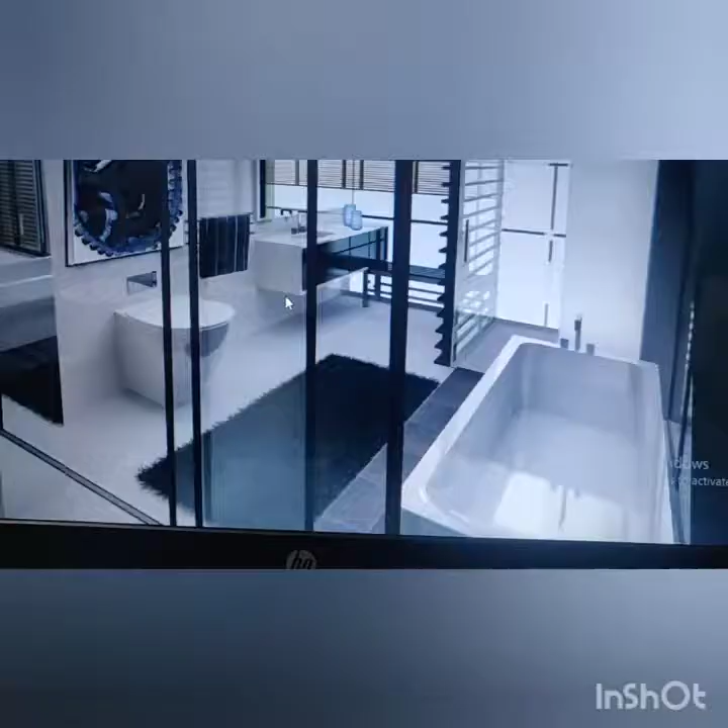This is the bathroom of contemporary design, with total modern furniture and interior. Hindware and Jaguar fittings are used throughout this contemporary design.

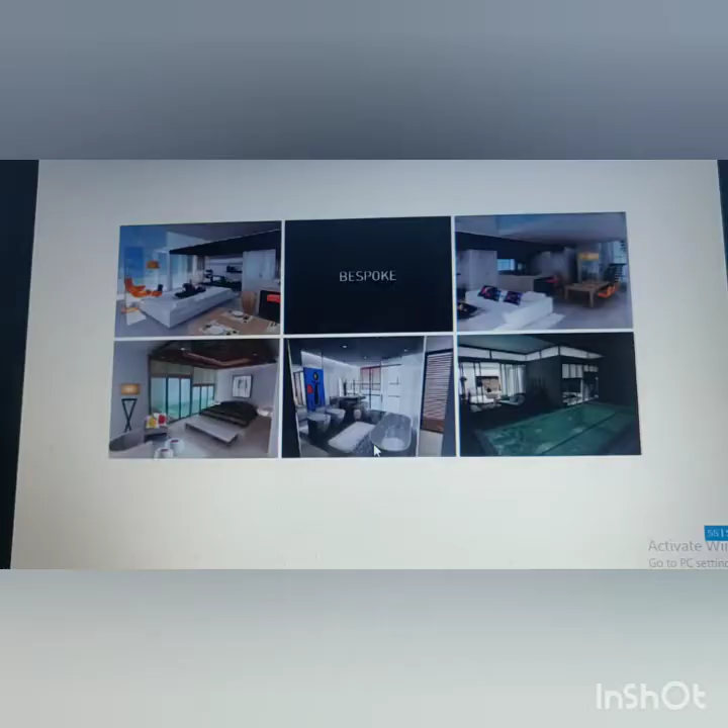Coming to the bespoke interior designing, as per customer reviews and customer requirements, we can provide the output from our creative team of interior designers. My next topic is home automation.

As you know about home automation, you can handle every device from your mobile phone from anywhere. You can handle your home things like fans.

You can check if the fan is off or on, if the AC is on or off. Some of the home automations are touchscreen home automation, video door phone, biometric locking system, 100% power back. Some of the advanced home automation highlights are interfaces.

And climate control covers your monthly bills with an easy eco concept by automating the system to conserve energy. If it is summer, we can make the inside cool. If it is winter, we can warm our interior.

Coming to the lighting, dimmers which are easily replaced with existing light switches or plugged into outlets to offer complete control. And next, a touch of your finger brings sensitivity, convenience, and comfort.

Home automation lets you do more with less energy, and we have unlocked your life with the latest technology, like more advanced lock systems we are providing for doors, main doors, and fire and gas alarms.

This has been set up with programming using email notification agents, like if any agent comes to meet you, or any pickup or delivery is going on, you can get an email notification.

As I said, there are 7 exits and 7 entries. These are the residential car park exit and entry points. We have one other for visitor car park access, where visitors can enter and exit separately, and commercial park access for the Aliens Mall. There is one more residential car park access, entry and exit.

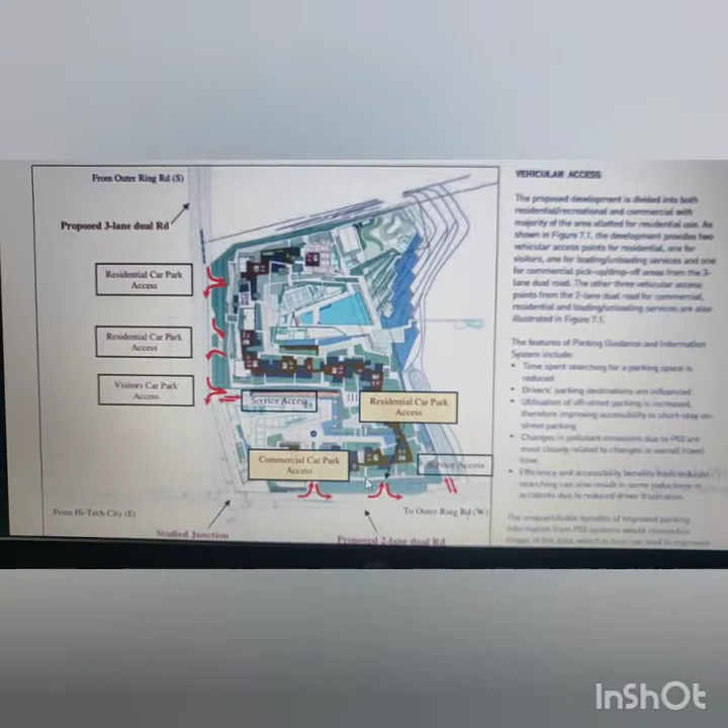These are the services like school buses, etc., and cabs also have dedicated entry and exit points for services.

There are timbered decks and boardwalks that help bring natural warmth in the hardscape palette and create a strongly identifiable feature. Also, paved and planted terraces peel away from the edges of buildings, with the podium dropping down at the lake to blend podium walls into the landscape, blurring the edge between the site and building.

Coming to furniture landscape, both older and younger residents can enjoy sitting there during evening walks and at night. They can easily spend time at the alien space station with these landscapes.

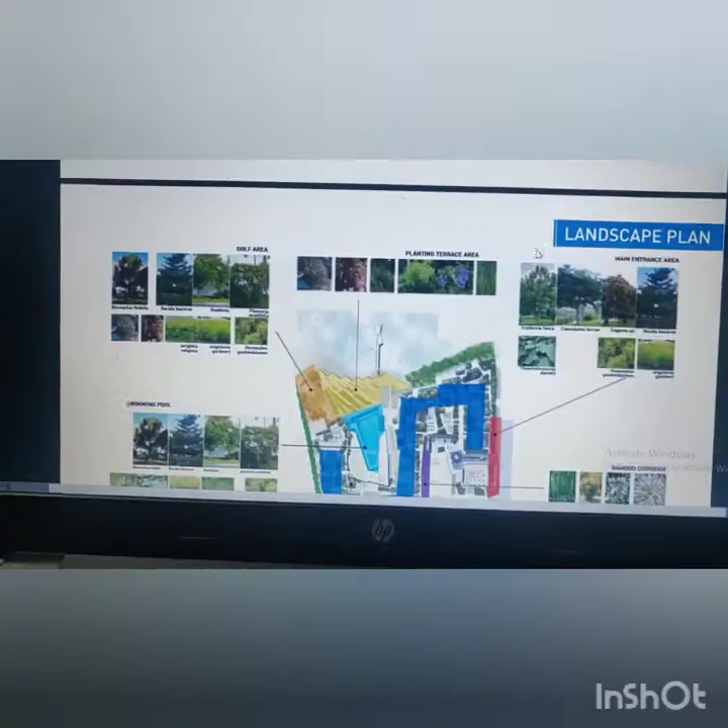Some of the landscape areas are the golf area and planting terrace area, main entrance area, the swimming pool, bamboo corridor, a park for children and elders, and a suspended lobby area. The al fresco dining area is also surrounded with trees.

Coming to our next main topic: fire safety measures in the alien space station. We have provided fire and gas leakage sensors, and a refuge area in case of fire, where residents can go to the nearest refuge area to be safely evacuated.

We have heat and smoke sensors, and sprinklers placed inside and outside apartments and in the basement for effective fire control. The helipad has been designed at an effective location, and there's automatic shutdown of gas in case of leakage, as we have piped gas connections.

Dedicated staircases for fire evacuation have been provided, along with dedicated fire engines in the township to ensure prompt response and control, and approach roads for fire engine movement all across the township.

Integrated facility: all fire and safety measures are integrated into the BMS for effective utilization of control.

Coming to the main structural advantage of Alien Space Station: it is a 30-floor high-rise apartment with an S-shaped structure, significantly superior to conventional buildings. Because it is S-shaped, each and every flat gets sunlight, which is why we received the IGBC award for energy efficiency. Our structural advantage allows us to get light from three sides of the apartment.

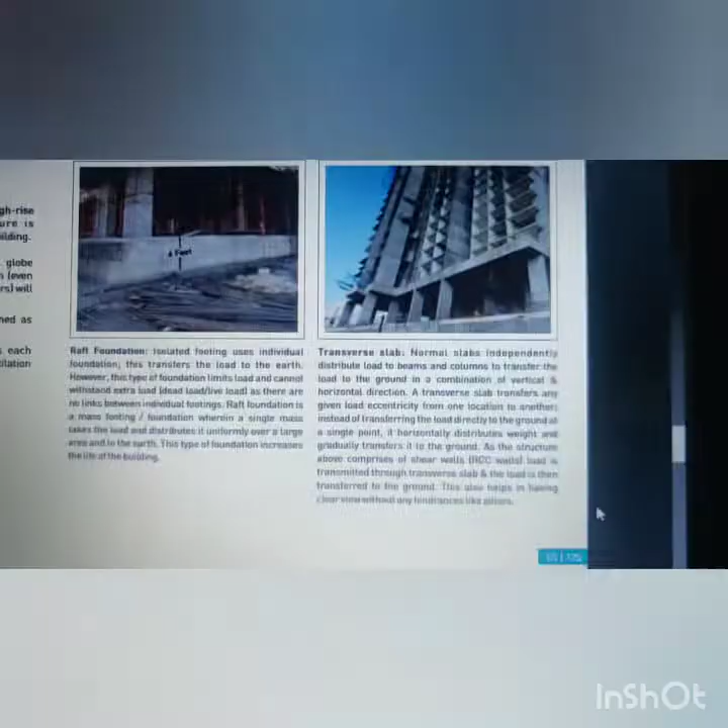Coming to the next feature, the shear wall. As I said, we have IGBC certification and haven't used any brick in the space station. There is a shear wall within the concrete structure, using walls made entirely of concrete.

The next structural advantage is the interconnected corridor, which is also very spectacular. This corridor is 1.5 kilometers long at each level, strengthening the building and giving connectivity in case of emergency. You can also reach one station to another directly through this corridor without using any lift.

In total, Alien Space Station features a driving range, putting green, amphitheater, lake, visual shooting range, cricket practice nets, jogging and bicycle tracks, natural lake view, commercial tower, clubhouse, landscaped areas, terracing, swimming pool, tennis courts, AC gyms, spas, restaurants, and we also have the Aliens Mall.

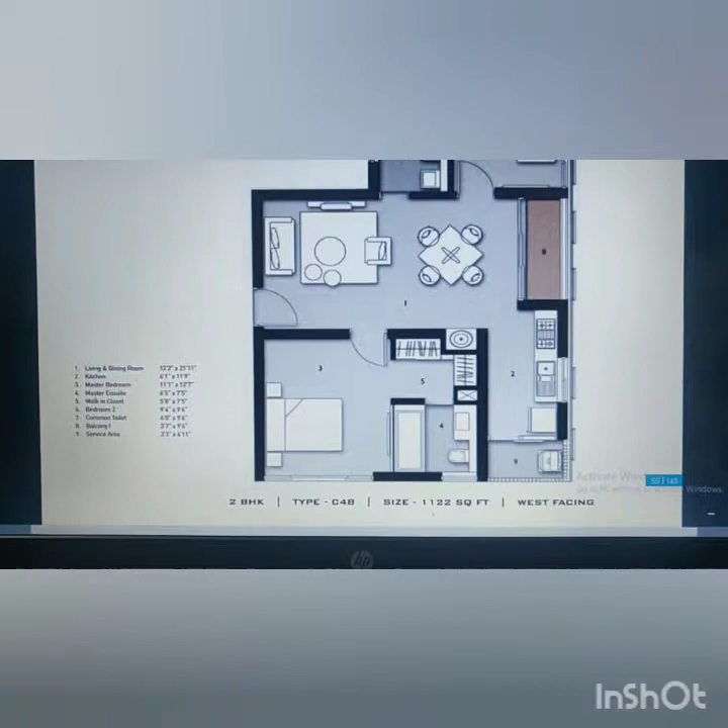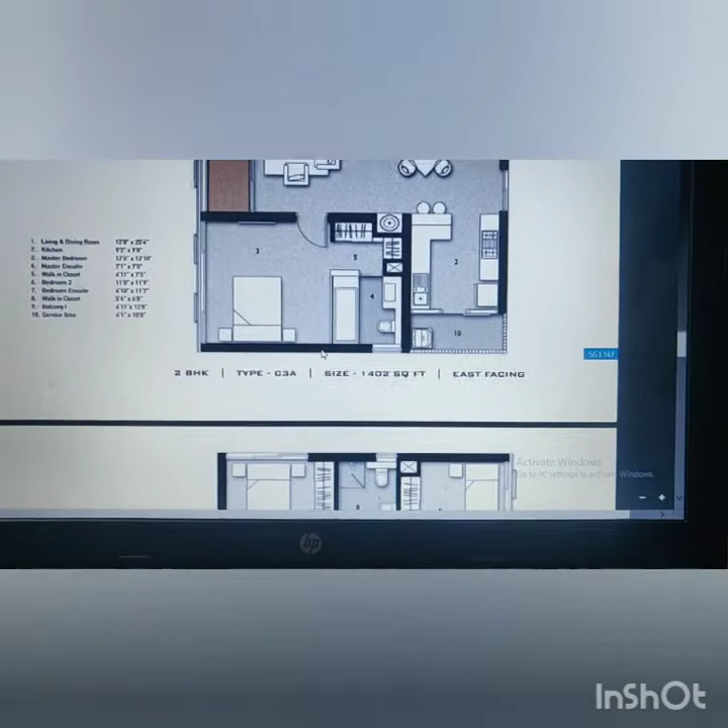This is type C3A, a 1402 square feet, east-facing unit. This is the living area, dining table, kitchen, attached bathrooms, and balcony. This is the dish area, this is the master bedroom, this is the children's bedroom, and this is the entrance.

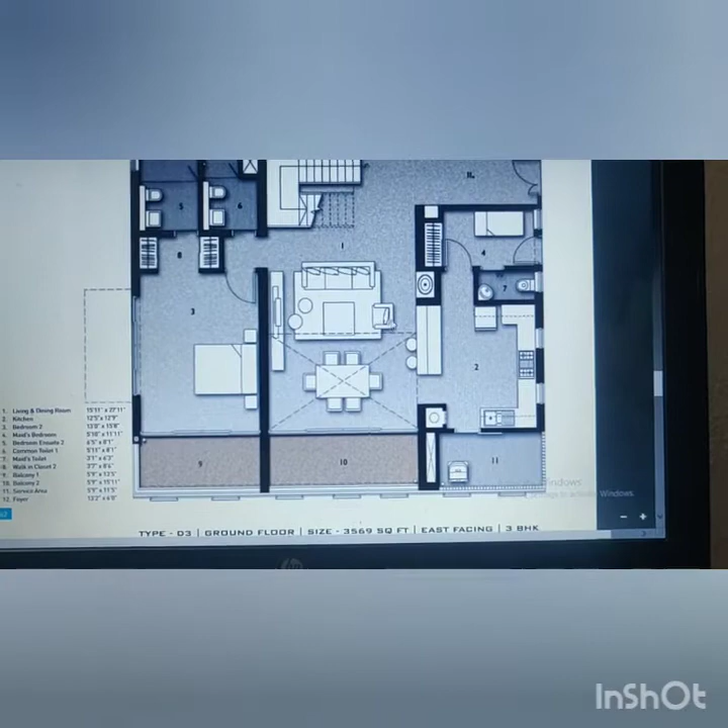This is the duplex apartment floor plan, specifically the ground floor. It has a living area, dining table, one bedroom with attached bathroom, one common bathroom, a small bedroom, and a kitchen with a wash area.

And this is the first floor of the duplex apartment. In this we also have the two bedrooms, and this is the staircase, and we have the attached bathrooms and separate bathrooms for the duplex apartments.

And my next topic is what to look for in real estate.

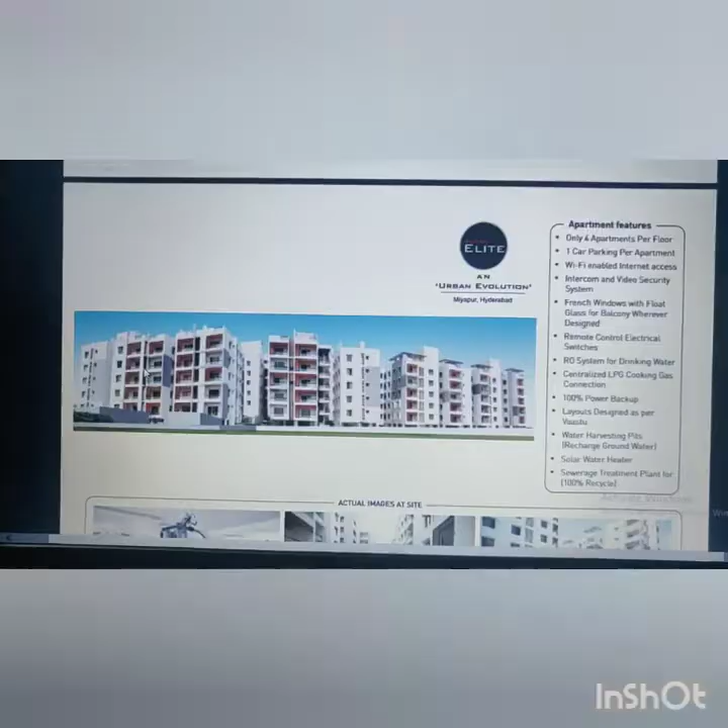The next work done by Aliens Space Station is Aliens Villas. This is Aliens Valley, also located in Gopanpally, Gachibowli, Hyderabad.

My next topic is a newsletter from our MD, Hari Challa. Some of the latest milestones achieved by Aliens Space Station include flat finishing work at the Station 6 project, completed mid-2019, Station 11 at 80%, Station 12 at 70%, Stations 7 and 8 at upper basement level, and Station 9 at raft foundation.

Hyderabad is one of the most sought after residential markets in the premium luxury segment, with prices at 4,950 to 5,500 rupees per square foot and 25 plus sales per month. This is a letter from our faithful customers, from our MD of Aliens Group, Mr. Hari Challa.

The property scenario in Hyderabad is rapidly increasing day by day, as it is mostly one of the major cities to have given high quality returns on investment among India's seven major cities, and sales have grown 32% from the average of 2013-14 to 2018.